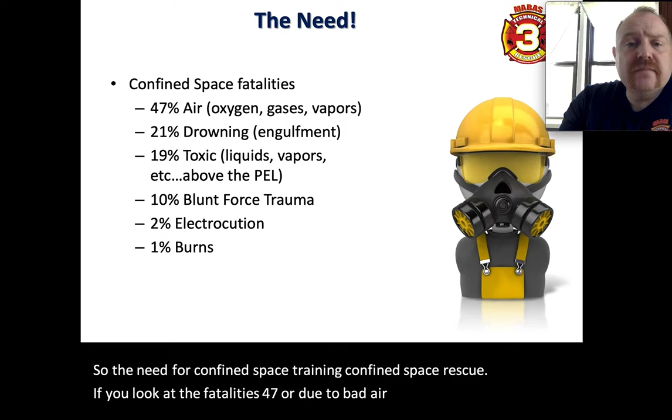All right, so the need for confined space training, confined space rescue. If we look at the fatalities, 47% are due to bad air, meaning lack of oxygen, gases, vapors, etc. Why do you think oxygen is the number one thing that gets us? Well, it's because we can't see it. There's no sign telling me, hey, it's bad, it's going to come get me. I probably can't smell it, I probably can't taste it. So air tends to be the number one thing that gets us.

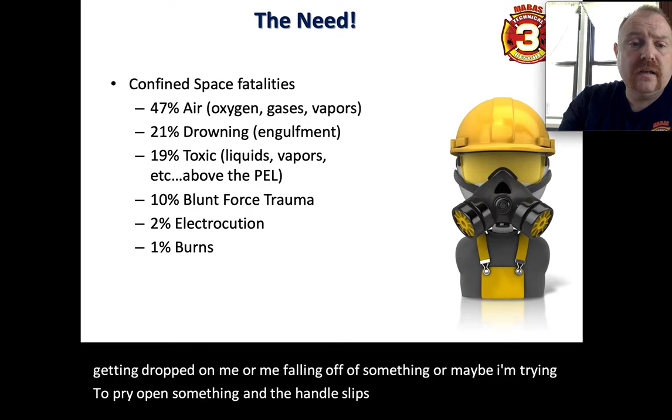All right, second would be drowning, then toxic substances. 10% blunt force trauma, probably something getting dropped on me, or me falling off of something, or maybe I'm trying to pry open something and the handle slips and whacks me in the head. 2% electrocution, and then the last one being burns. None of those are really great ways to go out.

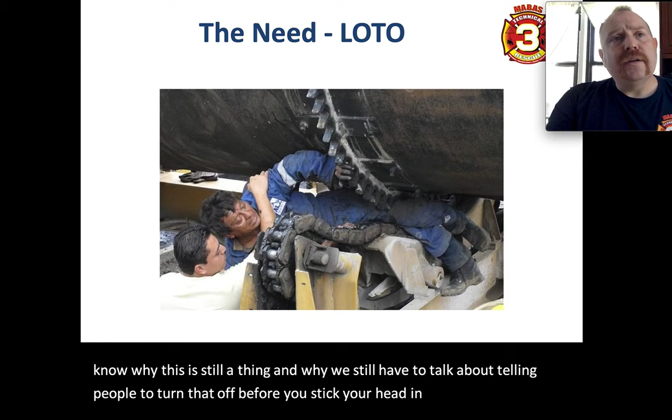Another big issue for us is going to be lockout tagout. I don't know why this is still a thing and why we still have to talk about telling people to turn that off before you stick your head in there, or disconnect the power. But it's still a thing, so lockout tagout is still very much important. I can show you pictures and pictures of people either trapped and dead, or trapped and still alive, kind of like this guy, just all the reasons why lockout tagout is so important.

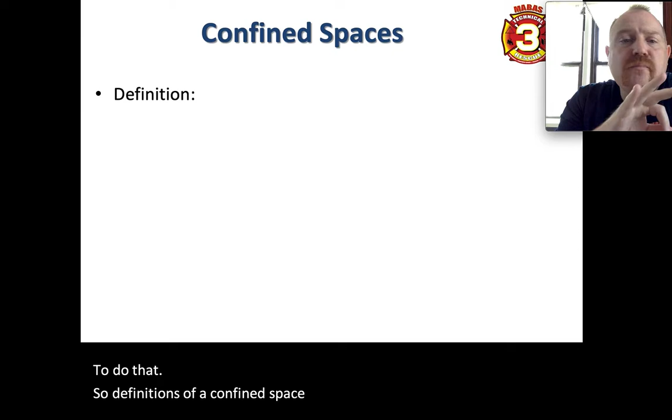So, definitions of a confined space. OSHA has a three-pronged component for their definition of a confined space. First, it has a restricted entry or exit. Restricted doesn't mean one way in and one way out - if that were the case, every bathroom would be a confined space. There's nothing restricted about walking in and out of a door. Now, if I were to board off that door and have to crawl in and crawl out, now it's restricted. OSHA even differentiates between walking down a flight of stairs versus climbing down a ladder. If I have to climb down a ladder to get into a pit, now that's restricted. Walking downstairs is not restricted.

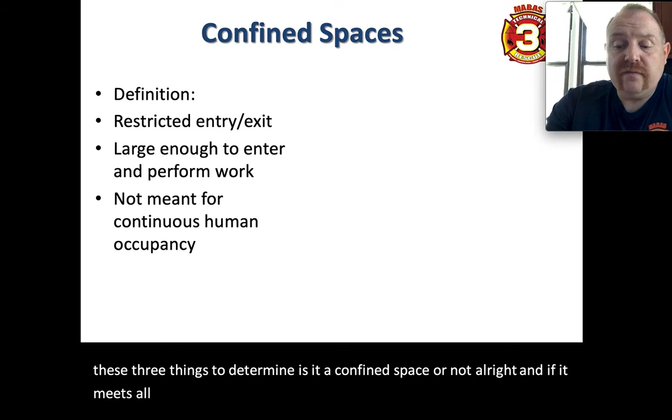The second component is that it has to be big enough for me to get in and actually do something. So a mailbox, for example, can't be a confined space because it's not big enough for me to get in and do something. The last one is that it's not meant for continuous human occupancy. So if I'm looking at confined spaces in my town, in my fire district, I'm using these three things to determine if it's a confined space or not. If it meets all three, then yeah, it would be a confined space as defined by OSHA, by ANSI, by NFPA.

Now we have to determine, is it permit required or not? In order for it to be permit required, it has to meet all three of those definitions plus any one of these four. Number one, it meets the definition and it has a bad atmosphere or has the potential to have a bad atmosphere.

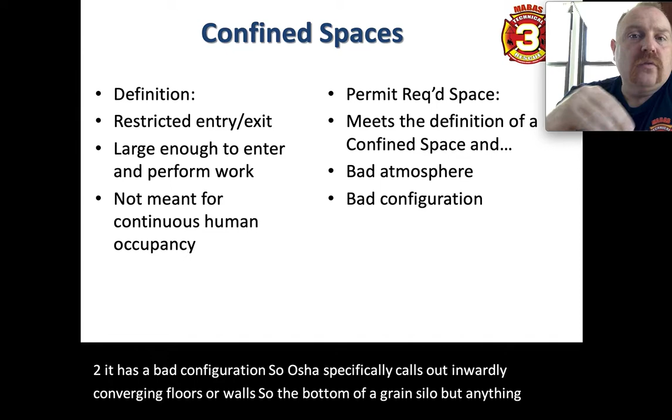Number two, it has a bad configuration. OSHA specifically calls out inwardly converging floors or walls, like the bottom of a grain silo, but anything that could get me caught or stuck would make it permit required. There's an engulfment hazard of some type, so that could be liquid or sludge, grain or soil, anything like that. And the fourth one, OSHA really likes their catch-alls. They like to have a catch-all in place: any other known hazard.

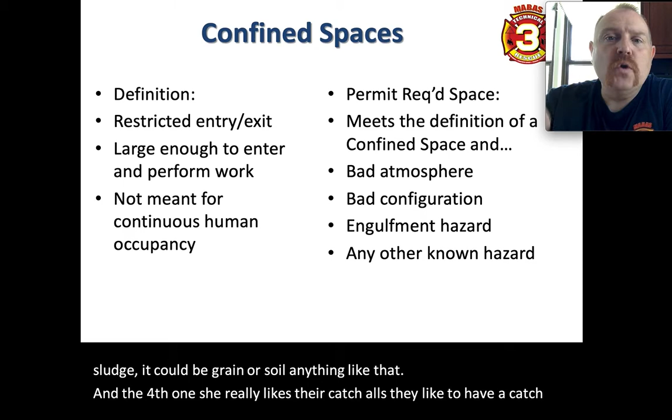So I'm armed now with these three components of the definition of a confined space. If it meets that, then I need to determine does it require a permit or not, and all it has to do is meet any one of those four.

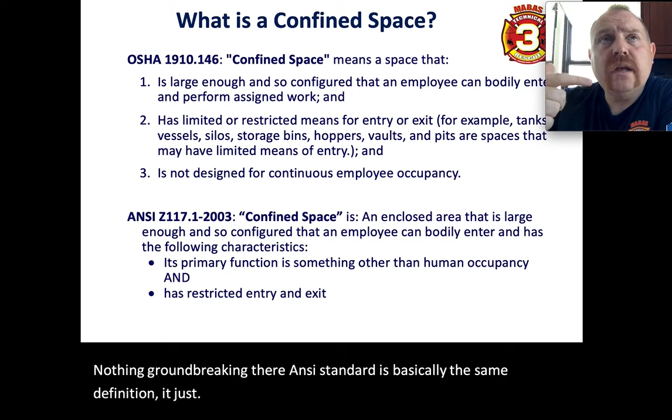Some municipalities, some jurisdictions in North America, add in a component for it to be a permit required space: if medical attention or emergency response is delayed due to the space.

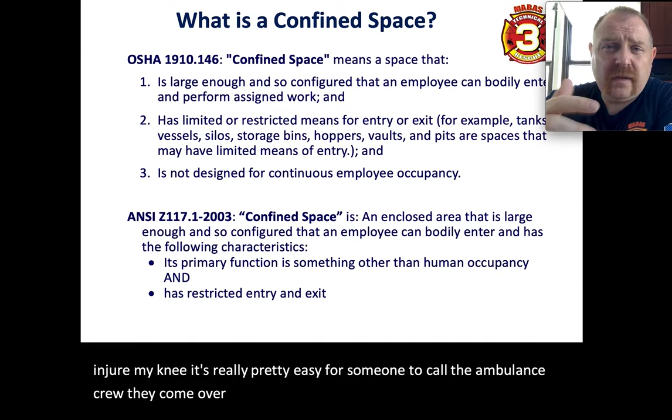So think about a space. If I'm at home or at the firehouse and I twist and injure my knee, it's pretty easy for someone to call the ambulance crew. They come over, put me onto the cot, back of the rig, off I go to the hospital. That same injury inside of a sewer, and I can't climb myself out of there, makes it a big deal. Now all of a sudden it's become a confined space rescue when really I just need help, but because the space has turned that into a greater hazard for me.

So other legislation or rules we might need to follow: OSHA 1926 talks about fall protection, making sure that I don't fall into the space versus falling off of something. Gravity doesn't care if I'm falling into it or off of it, so we need to make sure our attendants are tied off, and people working on or near the hole are tied off.

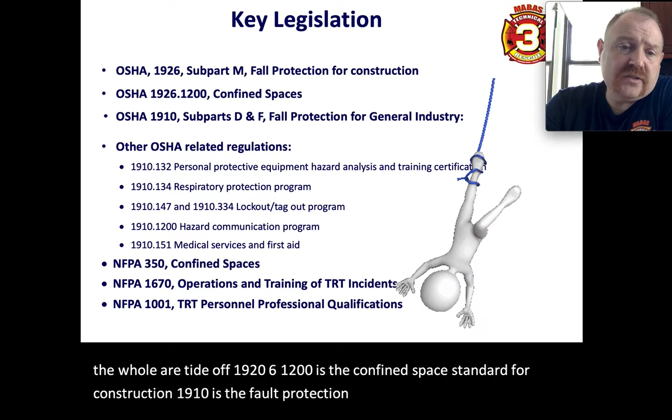1926-1200 is the confined space standard for construction. 1910 is the fall protection standard for general industry. Other ones we have to worry about: respiratory programs, lockout/tagout, hazard communication. If we look at NFPA 350, it talks about confined spaces.

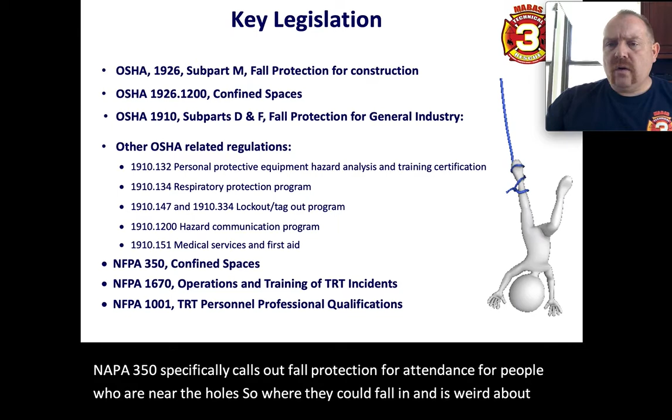NFPA 350 specifically calls out fall protection for attendants, for people who are near the holes where they could fall in. And it's weird about holes - you have a 3x3 hole that's a 20-foot deep hole, and nobody really thinks much of it. I go and put you 20 feet in the air near an unprotected edge with no guardrail or anything, and you act a little bit differently, you kind of edge up to it. But for some reason, when it's a hatch or a hole, we kind of ignore that problem.

1670 is operations and training of TRT incidents, and then NFPA 1001 covers TRT personnel professional qualifications.

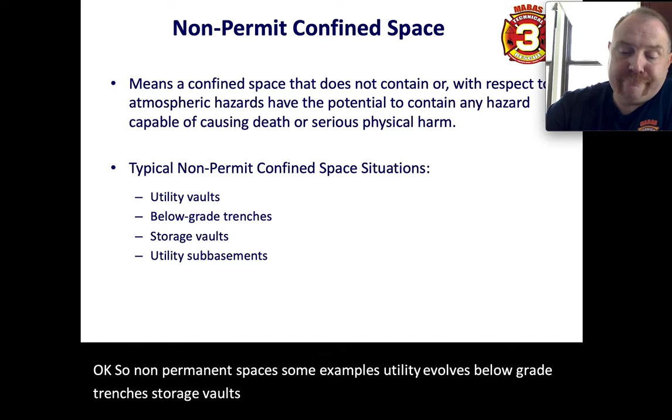Okay, so non-permit spaces, some examples: utility vaults, below-grade trenches, storage vaults, utility sub-basements. We see these all over the place. Some examples of permit-required spaces: chemical storage tanks, storage pits, boilers, underground tunnels, etc.

All of these contractors that we see going into confined spaces, or companies in your towns, they should have a written confined space management program. Any employee who works there should have the ability to go over and say, 'Hey, can I see the confined space program?' Open it up and be able to read what the rules are, what the policies are, what the SOPs are, etc. Likewise, those are our SOPs, that's our program, so we have the same thing.

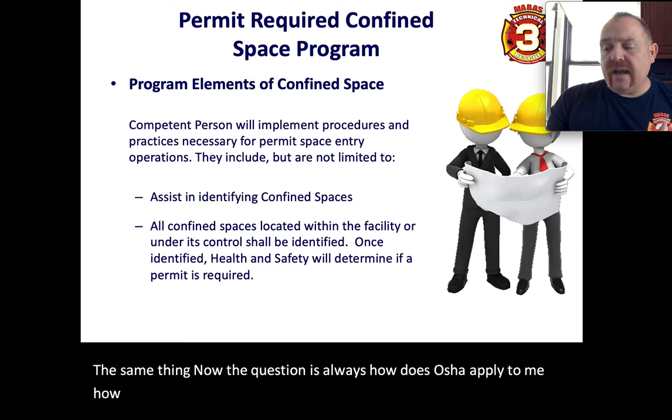Now the question is always, how does OSHA apply to me, how does OSHA apply to the fire department? Well, if you think about it, we're at work. When we train, we're at work, it's not part of an emergency response scenario. So for us to solely say, 'Hey, NFPA is the one I have to follow' - I'm at work, we fall under OSHA. Now in Illinois, because we're municipalities, IDOL is who enforces it, but they're just enforcing what OSHA says.

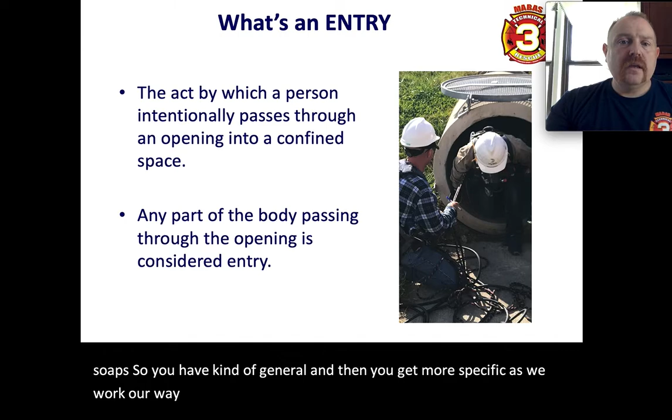So kind of the next level down from that is our SOPs. So you have kind of general, and then you get more specific as we work our way down. All right, so what is the definition of entry? Well, most of us, if we remember anything from confined space class, know that it's the breaking of the plane into the space with any part of my body. So the question is, am I allowed to break the plane into a confined space?

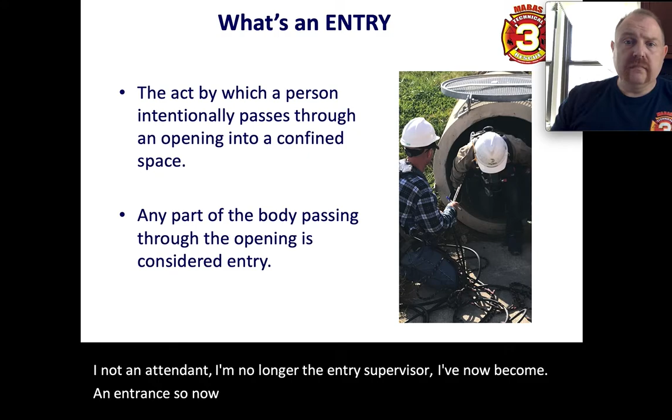The answer is yes, I absolutely can. But what am I now? I'm not an attendant, I'm no longer the entry supervisor. I've now become an entrant. So now on my permit, I need to be documented as such. There's nothing that says I can't make entry, but if I'm going to make entry, even by putting my hand in there, I have to be documented as an entrant. Just check and make sure I'm giving you guys all the info you need for your note sheet. So some potential hazards: engulfment, oxygen deficiency, oxygen enrichment, flammable gases, vapors, toxic substances,

IDLH atmospheres, and then physical hazards, slips, trips, and falls. I hit my head on something. It's full of snakes or scorpions or spiders or something like that.

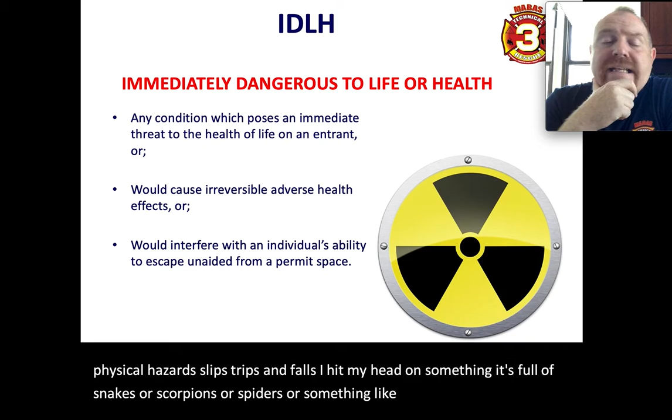This term IDLH, we see this, we talk about it, meaning immediately dangerous to life or health. This doesn't mean that I touch it and I die. It's not like some of the facilities and institutions we've gone to take classes, where it's 'oh, you touched that, you're dead.' It doesn't always mean that. It could mean that I die later—later today, tomorrow.

So think about that idea of IDLH. We're going to treat a space as being an IDLH hazard until proven otherwise. So when we're assessing the space, just don't assume that it's okay. I realize the ducklings are all right, but how much oxygen does a duckling use versus how much do you use? So assume that it's an IDLH atmosphere until proven otherwise.

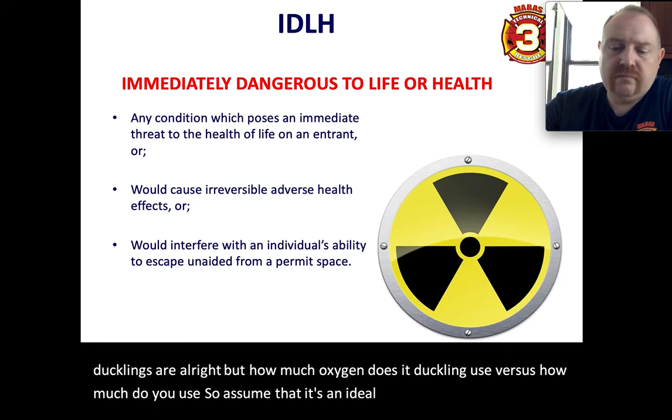Some of the hazards we might run into: explosions, fumes, machinery. When I see that picture, I think about the confined space incident they had out in Algonquin, at the Raging Buffalo snowboard park, where the guy got caught in one of the vaults underneath the magic carpet. He got his arm stuck in it, and they needed mechanics to actually help take it apart.

Then you have entrapment hazards, noise. Noise isn't one that you think about readily, but it's really going to hamper our communications and the way we think, and how we're able to work in there. None of us want to be walking around at 50 with $6,000 hearing aids on our ears.

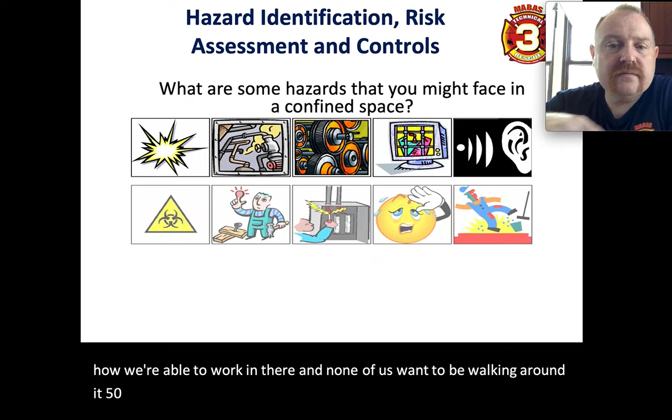Biologic hazards, standard work hazards, electricity, heat—it's one that we don't think of as much. You have young guys who might have gone out and tied one on the night before and come in dehydrated. You have older guys getting outworked by younger guys, so we drank too much coffee trying to keep up with them. So if heat is an issue, make sure we're rotating guys a lot faster and a lot earlier.

Also, it might be that you're one of the younger team members getting outworked by an old guy, so you're trying to keep going. Make sure we stay hydrated and rotate people out more often. Last one on there, slips, trips, and falls, and then the bottom one, weather stuff. Those first two, sometimes that's not stuff we can control.

If I'm in a storm sewer, it's really kind of impossible for me to fully lock out and tag out that storm sewer. Out in California, they actually have diverting valves that they can use to divert the water a different direction, so they can pull it off. But with us, we can't do that. So make sure we're paying attention to what the weather's doing. Drowning or engulfment hazards, radioactive stuff, and then sludge, cave-ins, etc. Watch this video and see if you can tell me what you think about it.

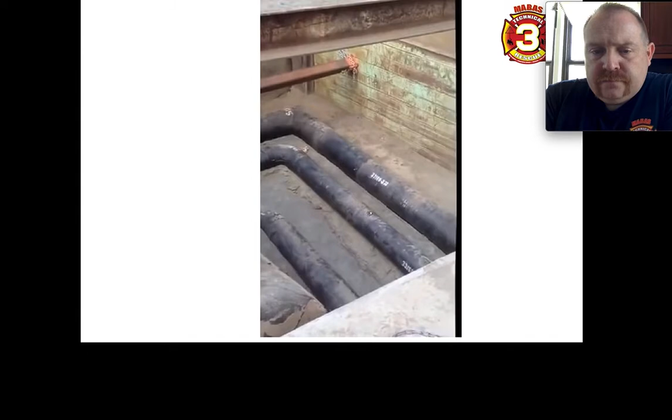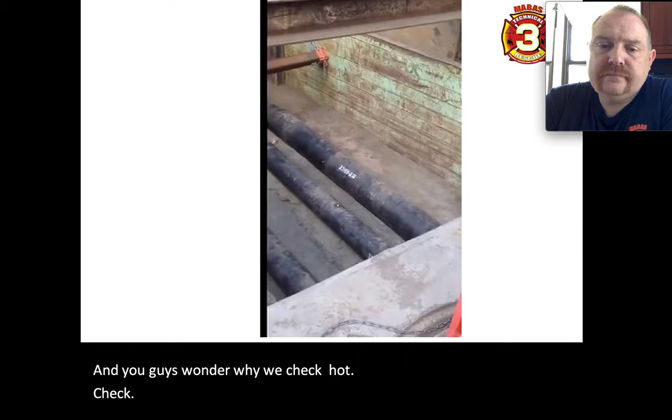I wouldn't want to be in that vault right now. You kidding me? Couldn't pay me enough to do that, Joel. And you guys wonder why we checked the fucking torque. That didn't sound good. That's why we check torque on bolts, guys. Jesus. Yeah, Joel, maybe you should step out for a minute, until that thing settles in. Yeah, get out.

All right guys, sorry that the video was clipping so bad. I think it's the recording for this video, plus the Mac is six years old, so it might be having a hard time. So if you watch this video, there's a lot of stuff going on here that shows it's in bad shape.

First of all, you can hear them talking about it, saying 'oh, you couldn't pay me enough to be in there.' There's one part where the camera pans up to an attendant standing there, and he looks right at the camera—he knows something's wrong, but they all know, and they're not going to say anything. They're not going to stop it for some crazy reason, because nobody wants to be that guy. They don't want to be the one who says 'hey, this isn't safe, let's not do this.' They'd be the nervous Nelly.

So they just let it keep going, and then what ends up happening is that guy kind of gets blown out of that hole. At the very end of the video, you actually see the attendant or the entrant kind of walking away, but it looks really, really bad.

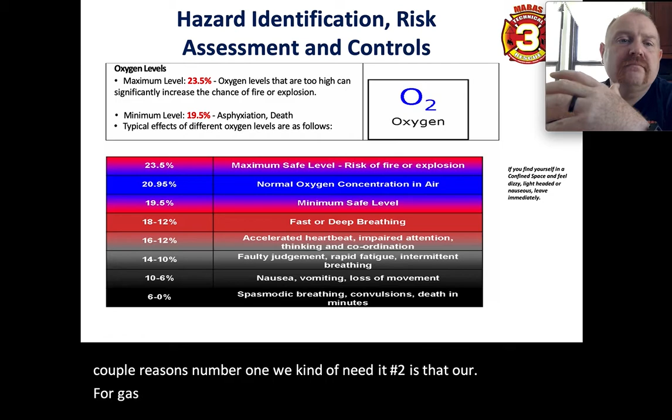All right. So hazard assessment. The first thing that we're always going to check for when we look at the atmosphere is going to be oxygen, for a couple reasons. Number one, we kind of need it. Number two is that our gas meters need a certain amount of oxygen in the air for the reading to be accurate. So we kind of want to know what that number is.

So years ago when we had 4 or 5 individual meters, and this one checks oxygen, we would just check that one first. Well, now with the technology we have, the 4-gas meter just checks it simultaneously. So if I look for appropriate values in the air, 20.8 or 20.9 is what we breathe normally. We are designed to breathe dirty air.

78% of what we breathe is nitrogen. So we breathe it in, we breathe it right back out. And then there's like another percent of a bunch of other stuff that we just kind of breathe in and breathe out. So the good range is 19.5 to 23.5. If it's 19.4 or less, it's considered oxygen deficient.

Now, at 19.4, I don't fall over dead. It means I'm going to start breathing a little bit harder. As it starts dropping, I have an impaired attention span, which I already have. I'm not making good decisions. Some of us are making bad decisions anyhow, so I don't know how you tell the difference. But then as it goes lower and lower, finally, I would go unconscious. But there would be other symptoms first.

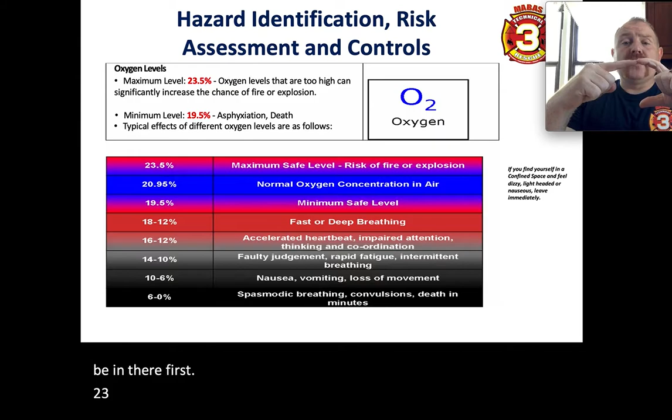23.5 is the upper limit. So anything 23.6 and above would be considered oxygen enriched. Obviously, the reason why that would be bad for us is that fire really, really likes oxygen. So what we're looking for is oxygen that's 20.9. If it's not 20.9, my question is, why isn't it? What else is in there that could be causing me a problem? 1% of change could mean 10,000 parts per million of some other gas. So let's fix it, ventilate it, and move on.

So the second thing we look at is going to be the LEL, or the flammability. So we look at our LEL and the UEL. The LEL, the lower explosive limit, or the LFL, the lower flammable limit. And our 4-gas meters are going to start to alarm at 10% of the LEL. So right here is where our meter is going to start to alarm. Now, if your meters are set to alarm at 5 and 10, it'll start at 5% of the LEL.

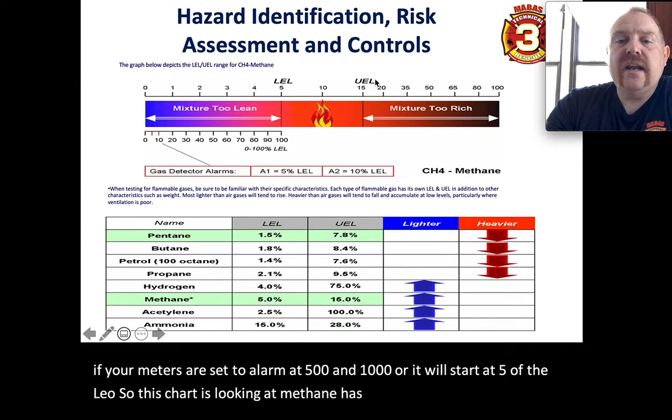So this chart is looking at methane. It has an LEL of 5% and a UEL of 15%. Here it's too rich, here it's too lean. Our meter is going to alarm down here. Now, that's because my meter has been calibrated to methane.

Well, if the gas that's in the space is different or has a different LEL or different flammable range, it's not going to be 100% accurate. So if we're looking at, say, propane, propane has an LEL of 2.1. So we're going to say right here is where we're at the LEL for propane. Well, now I don't have 90% more to go. I'm almost a third of the way there already.

So if it's alarming, if it's showing us that there's an LEL in there, we're going to ventilate it and get rid of it and hopefully find the cause of it or the source, because we're all flammable. Okay.

So some definitions that we need to understand. Percentage. If we're talking about percent, you have to know the total amount in order to use the term percentage. All right. If there's 5 of us in the room and I say 20% of us have red hair, well, that means 1 out of 5 has red hair. I have to know the total amount.

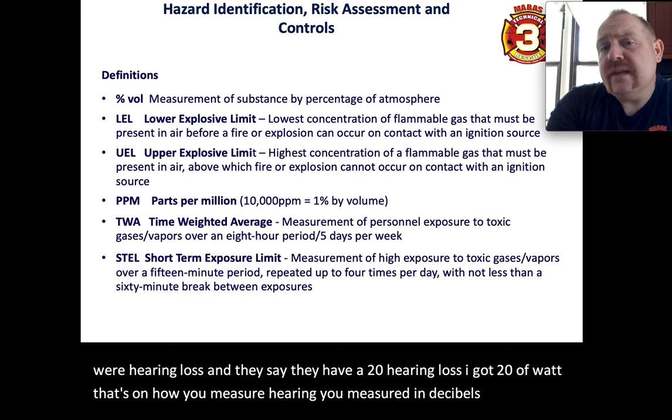It's like when people say they have a 20% hearing loss. Like, 20% of what? That's not how you measure hearing. You measure it in decibels. So we tend to use percentages because we understand them, we think. So make sure that if it's measured in percentage, that's what we're using. The LEL and the UEL, we talked about just a minute ago.

Parts per million. The easiest way to explain parts per million is if I were to take this room and fill it up with 1,000,000 white ping pong balls. I take one and I paint it red. Now I have 1 part per million. 1% of 1,000,000 is 10,000 parts. So think about that for a second.

If I've got a change on my 4-gas meter of 1% of oxygen, so there's some other gas that's displacing the oxygen, pushing it out of the way, there could be 10,000 parts per million of ethyl, methyl, bad stuff number 2 that may not affect me right now, but gives me cancer 10 years down the road.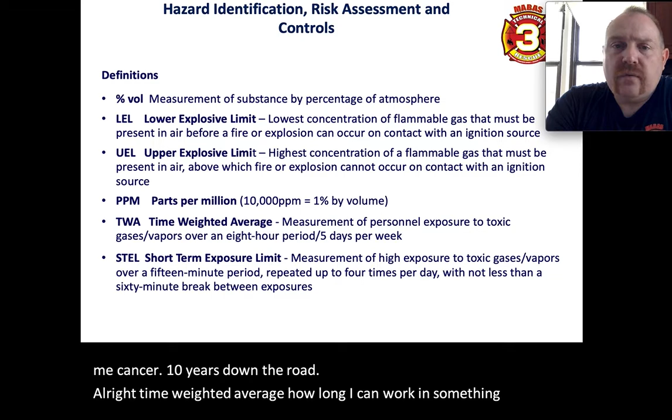All right. Time weighted average: how long I can work in something, 8 hours a day, 40 hours a week. And then your short-term exposure limit: how long I can work in an environment for 15 minutes, 4 times a day with a 1-hour break in between. So 15 minutes, 1-hour break. 15 minutes, 1-hour break.

All right. Where we're going to get this information, to know what our time-weighted average is, what the STEL is, what my ceilings are, where it's IDLH, where the flammable limits are, etc., is going to be in the SDS of the chemical. The companies in your district should be using the GHS system, the Globally Harmonized System. Any country that's part of the UN has adopted this, so SDS, or safety data sheets, are now standardized. So it should look the same.

What used to happen is it was dependent upon manufacturer to manufacturer, what was on there, how it was organized, etc. So now they've given a better organization to the SDS. All right. This is going to be our roadmap. This is going to be how we're going to know what the hazards are.

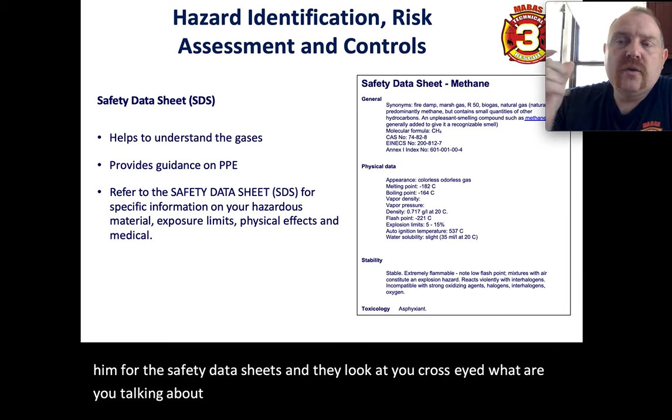If you show up and you ask them for the safety data sheets and they look at you cross-eyed, like, what are you talking about? That should raise your antenna and tell you, all right, this is going to be a bigger deal because they don't even know what an SDS is.

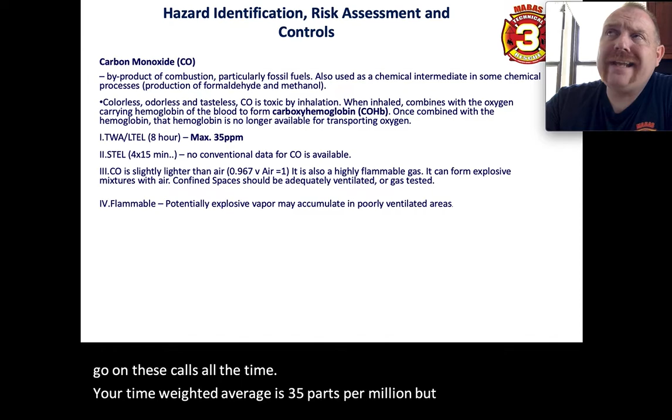All right. So the next chemical we want to look at is carbon monoxide. We go on these calls all the time. Your time-weighted average is 35 parts per million. But if you look at somebody else, like I think NIOSH is 25 parts per million. So depending on where you're working, OSHA's 50 parts per million. Again, if it's there, we're going to ventilate it. We don't want to breathe it. It's bad. It'll give us a headache and eventually make us nauseated.

The weight of carbon monoxide is 0.967. So remember, when we look at vapor density, we're looking at the weight of the gas. So we take air and we give it a value of 1. So like helium is 0.5. It's much lighter than air, so it's up there. Carbon monoxide is 0.96, so it's slightly lighter than air, so we're going to expect it to be up a little bit, but it pretty much could be just about anywhere.

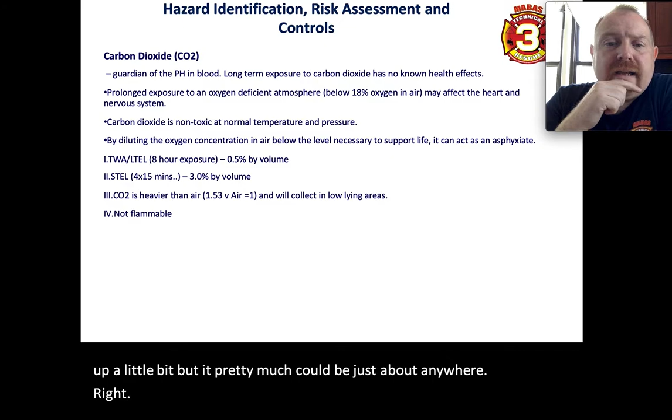All right. Carbon dioxide comes from us. That's what we breathe out. So we go on CO calls. We do not go on CO2 calls, at least not typically. We don't use a CO extinguisher. We have a CO2 extinguisher. This comes from us, and on the good-bad scale, it's bad. So the space that we're in, we could be poisoning ourselves just by being in there.

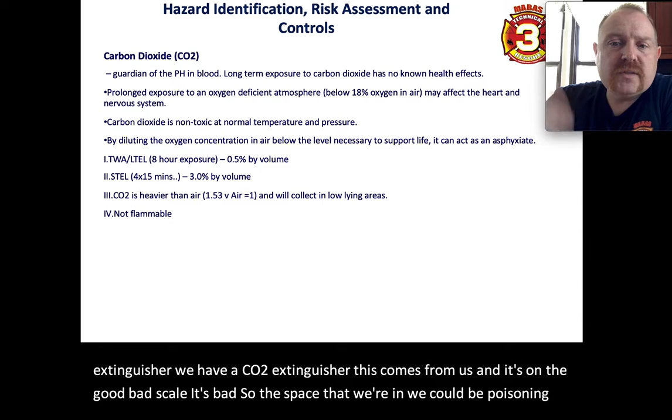There's a video from a long time ago of a train derailment, and you see a boss. You can tell he's a boss because he's wearing a white shirt, and there's product offloading of this tanker car, and he like sticks his hand in there and tastes it. I know we all watched Miami Vice as kids, and Sonny Crockett always tastes the cocaine. So yeah, don't trust our 5 senses. Make sure we're using some kind of a meter or something.

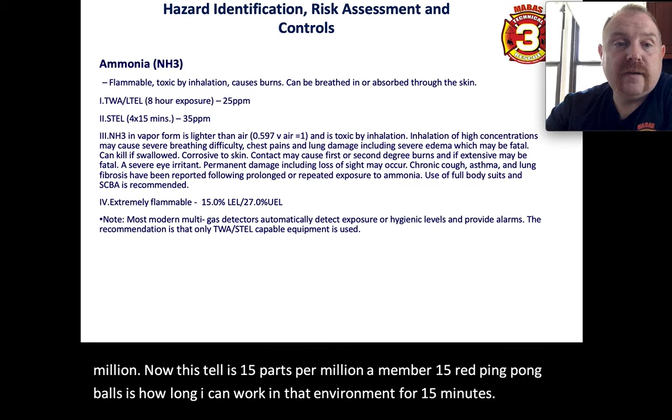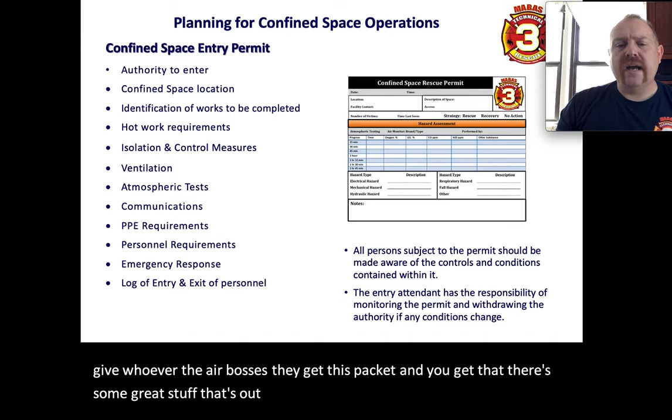All right. So your permits. We developed this permit last year. We wanted something that was kind of quick and easy and kind of dirty, that a squad boss at a space could fill out while companies are working. There are some great resources out there, where it's 20, 30 pages, confined space permits with different sections. You give whoever the air boss is this packet, and you get that packet. There's some great stuff out there. We just wanted something easy and quick and dirty that would help us meet OSHA standards, OSHA requirements, and yet allow us to get some work done.

On the left-hand side is information that has to be there. OSHA lists out what you've got to have on your permit. So date, location, description of the space, how many victims, the last time they were seen, what strategy are we in, rescue, recovery, or are we not doing anything at all? What your atmospheric testing says, the air monitor brand and type of monitor, and then signing off saying, I'm the one who did it. We need to be documenting our results every 15 minutes. That doesn't mean we only check it every 15 minutes. It just means we're going to actually document it every 15 minutes.

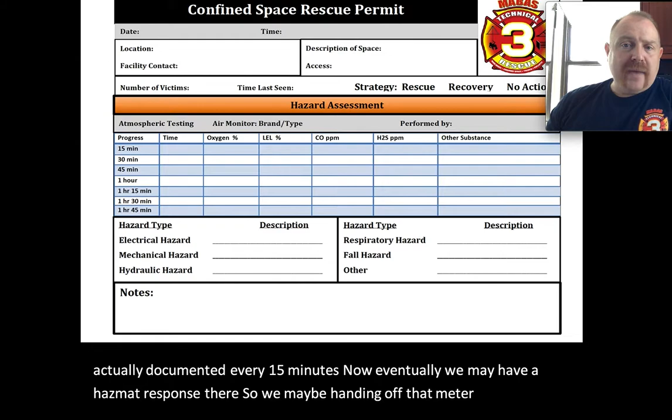Now, eventually, we may have a hazmat response there, so we may be handing off that meter to a hazmat team member. I would much rather have a hazmat team member who is really in tune with what this thing can and can't do. I'd rather have that information come to me versus one of us who, when things start flashing, starts hitting buttons and messing it up sometimes. So eventually we might be handing this off to somebody else.

The other thing is that I really like working on a 2 meter system, one up top with a pump with a hose, or one outside the space with the hose maybe attached to like a broom handle that we can stick in there and monitor, and then a second meter on the entry teams. If both meters are saying the same thing, we can be pretty confident in their results. If they're way off, there might be a problem with one of them, or it could simply be that the entry team is working in an area that the meter up top can't sample. So, marking that information down so that we're keeping track as we go through.

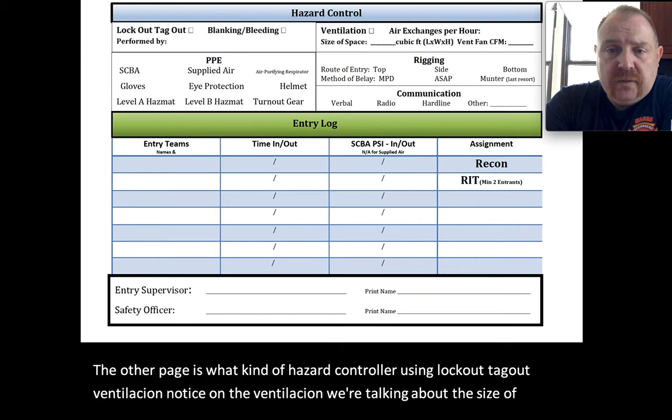You also have other hazard types: electrical, mechanical, hydraulic, and any other respiratory, fall hazards, anything else, spiders, snakes, whatever. The other page is what kind of hazard control we're using. Lockout, tagout, ventilation. Notice on the ventilation, we're talking about the size of the space. So we're going to ask you to do a little bit of math. Length times width times height. That'll give you the cubic feet. And then what the CFM of the fan is. We'll talk about that in a little bit. And then actually doing the math to figure out the total air exchanges per hour. All right.

Down on the entry log, who's going in, what time did they go in, if they're on SCBA, what's your pressure in, pressure out. We need to make sure that we have names. I would also probably, underneath the entry team, have their unit number. Squad 1, squad 2, we call them recon, etc.

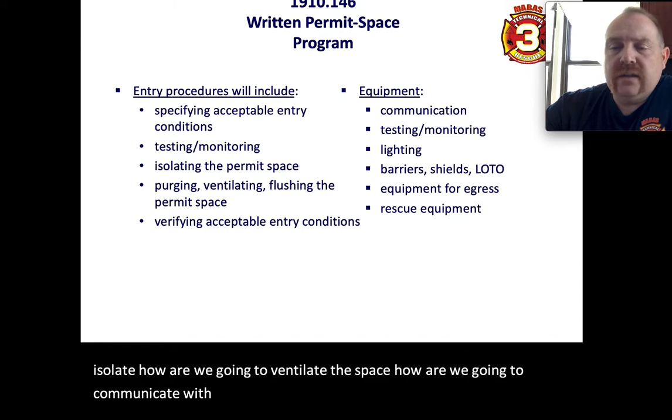So your written permit, permitted space program, what are our entry conditions going to be? How are we going to test? How are we going to isolate? How are we going to ventilate the space? How are we going to communicate with one another? Lighting, barriers, lockout, tagout. All of these things are included in a standard confined space entry program.

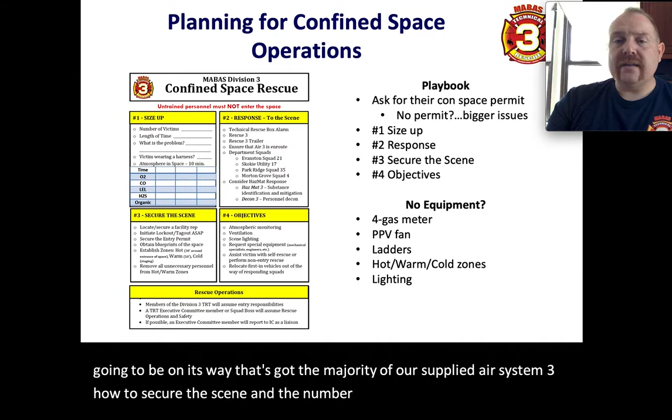Number 1 is size up. Number 2 is what's the response, so ensuring that we actually ask for a box alarm for the team to show up. Making sure that, especially for confined space, Air 3 is moving from NIPSTA if it's a weekend or after hours, ensuring that it's on its way. That's got the majority of our supplied air system. Number 3, how to secure the scene. And then number 4, what are your objectives? What are we asking you to get done before the team arrives?

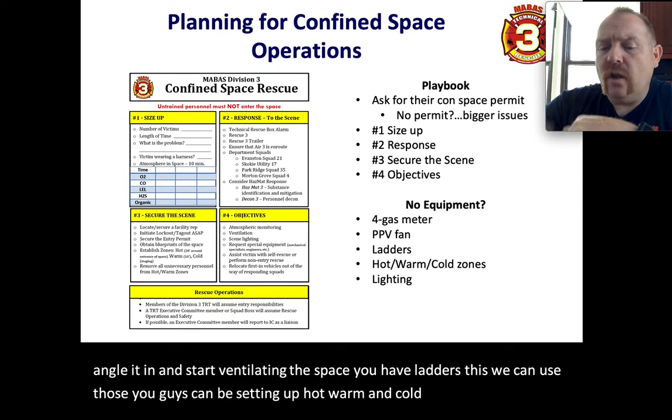Now, some places will say, hey Dave, we don't have any confined space equipment. But my guess is that you have a 4-gas meter, you have a PPV. So if ventilation is an issue, especially the new battery-powered blowhard fans, we can angle it down and start ventilating, or angle it in and start ventilating the space. You have ladders, so we can use those. You guys can be setting up hot, warm, and cold zones, and then lighting. You've got all those things that really make it a lot easier.

This is the kind of conversations you ought to be having with your first-in companies, so they feel comfortable with it, and that they're okay with asking for the team to come in. You'll notice the bottom of that form explains that we're coming in to help you, and that we'll give the incident commander somebody to kind of help them through as the incident progresses.

So your equipment. We mentioned the 4-gas meters. On Rescue 3, we have Draeger 4-gas meters, and then we have an MSA Altair. Those are the ones that we've been issued. We bought the Altair a few years ago. There's two forms of maintenance that needs to be done to the 4-gas meters.

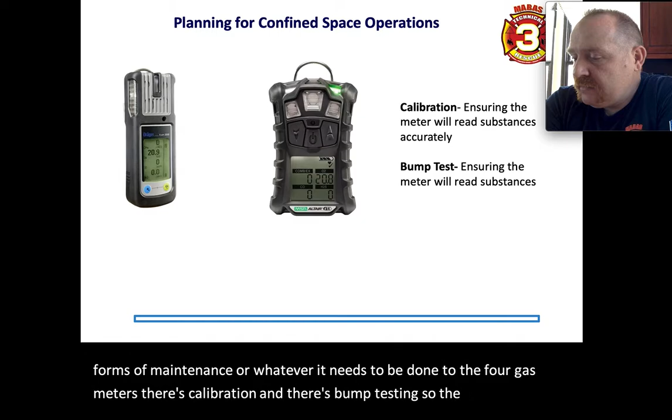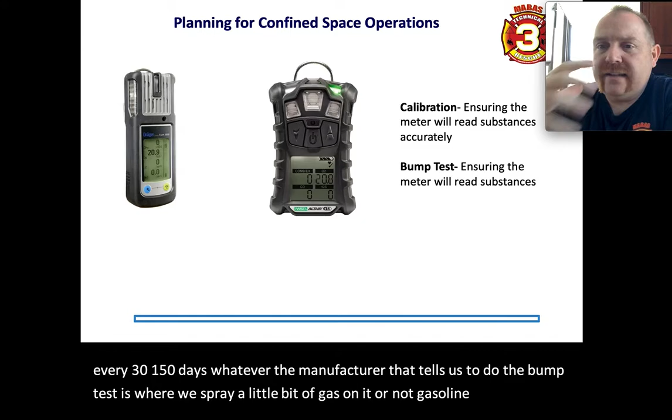There's calibration and then there's bump testing. I just realized I missed one of my questions for you guys, I'll talk about it in a minute. Calibration is making sure that it will read it accurately, so typically that calibration gets done either every 30, 60, 90 days, whatever the manufacturer tells us to do. The bump test is where we spray a little bit of cal gas on it, or blow on it, or inject into it, and it'll start to alarm and show us that it can read gas.

OSHA wants us to do that bump test before any entry. The problem is that for us in a rescue scenario, we don't have that ability to go, hold on, Bob, we got to do this thing with the meter before we can get in there. If they already have meters that are working, we can ask them, have they been calibrated? Have they been bump tested? And if yes, it's on our permit, we're good, we can trust their meters. I would want to back it up, trust but verify. But we can be using our meters to put them to work also.

When the hazmat team arrives, or one of our team members who's also dual trained in hazmat—Kevin Maslin, Doug Lindstrom, Mikey Isom, I'm sure I'm missing others—they show up and we can say, hey, can we get the other meters? Can we switch them out after they've been bump tested? Then we can keep the operation going. We're not going to stop and do nothing while we're waiting for a bump test. That's just not feasible.

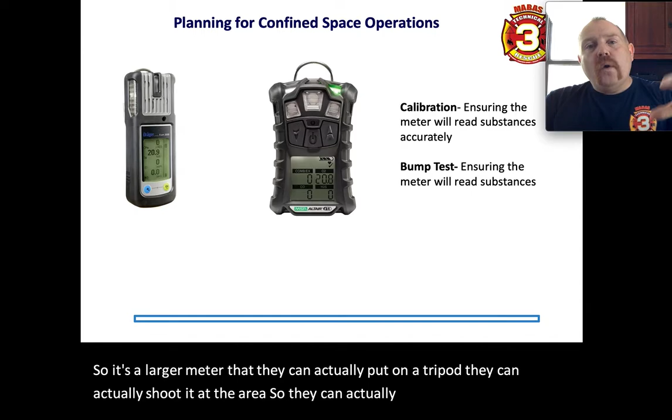The hazmat team has more meters, and they also have what's called an AreaRAE. It's a larger meter that they can put on a tripod and actually shoot at the area, so they can measure what kind of air and particles are coming out of that space. So we're testing in the space.

You think about an incident—where does everyone want to be? Well, they're going to go right to the hole, and everybody's got to go look over and go, oh look, it's a sewer. It's what everybody does naturally. Well, we don't know what's coming out of that space. So if we have the hazmat team there, we get that opportunity. We can actually measure and see what's coming back out of there. Is it hazardous to us? Do our attendants need to be in some type of PPE?

All right, the last thing for meters: make sure we know we're using the meter the way it's designed to be used. So both of those meters on the screen, neither one has a pump on it.

So if I'm trying to test the space, what you'll see people do sometimes is take a rope, attach it to the meter, and go dropping the meter into the space. A couple problems with it: if it starts to alarm, you pull it back up to see what it said. By the time you pull it back up, it's not going to say that number anymore. So you don't know how or why it alarmed. Maybe you're savvy enough to check the peaks, but my question is, did you clear the peaks before you put it in, or are you just hoping that's what it's related to? We don't really know.

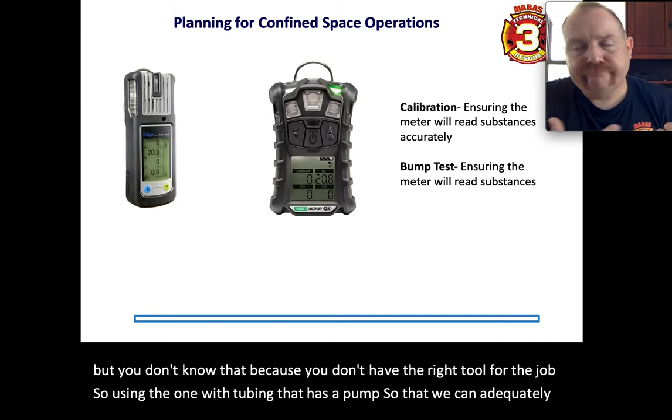Likewise, you could lower it in, and remember there are set limits where it'll start to alarm. If it's at 9% of the LEL, it's not going to alarm. So you're at 9, but you don't know that because you don't have the right tool for the job. Using the one with tubing that has a pump so we can adequately measure the space—that's the way to go. Only other thing with that tubing: you have to wait for the pump to draw the air up into the meter and give it a second to think about it before you move on or take that reading.

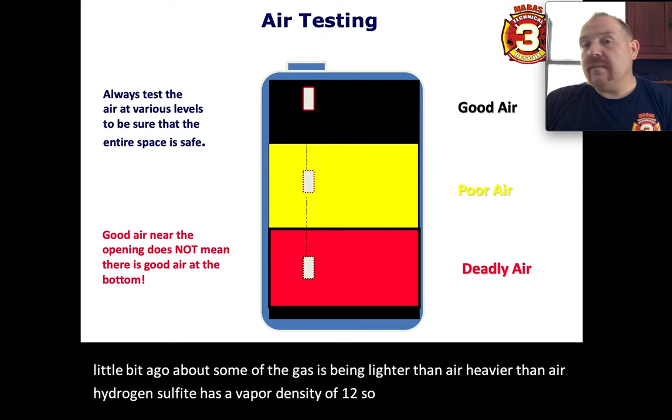When we go to do that testing, we're going to test top, middle, bottom of the space. We just talked a bit ago about some gases being lighter than air, heavier than air. Hydrogen sulfide has a vapor density of 1.2, so it's heavier than air and will be at the bottom, versus ammonia, which is like 0.5, so it's going to be up high.

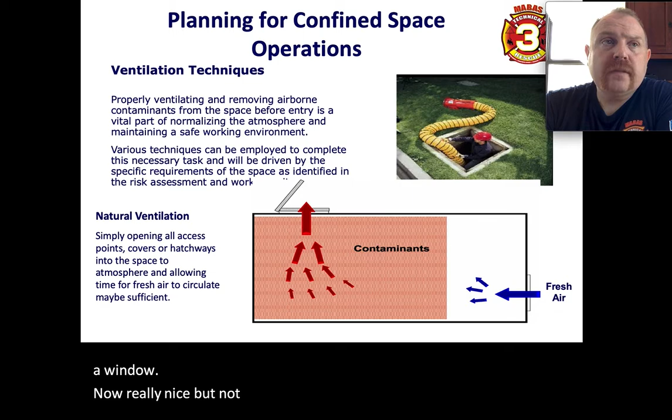With these issues, ventilation is going to be one of the best things we can do. Two types of ventilation are out there: natural ventilation and forced air ventilation. Natural ventilation is opening up a window—really nice, but not always reliable. So most of the time we're going to go to a forced air ventilation system.

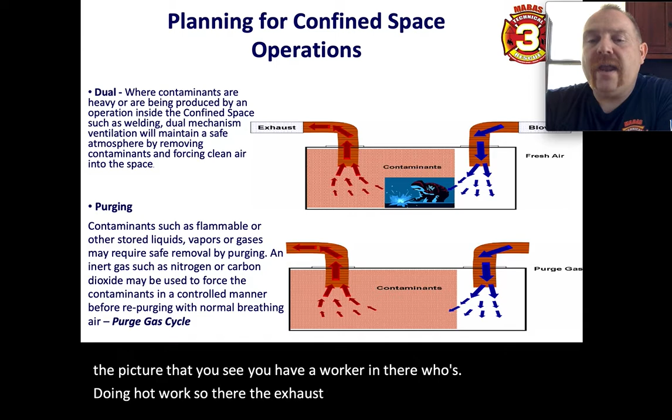That top picture—we're blowing fresh air in, we blow the bad stuff out, we're good. Another type of system might be an exhaust system, not as popular or widely used, but it could work, where we're drawing the bad air out and drawing fresh air in. The Cadillac of systems is really a push-pull: you're pushing fresh air in, drawing bad air out. The picture shows a worker doing hot work, so the exhaust isn't just drawing out random air—it might even be a local exhaust, sitting right next to where he or she is working, pulling the bad stuff out of the space.

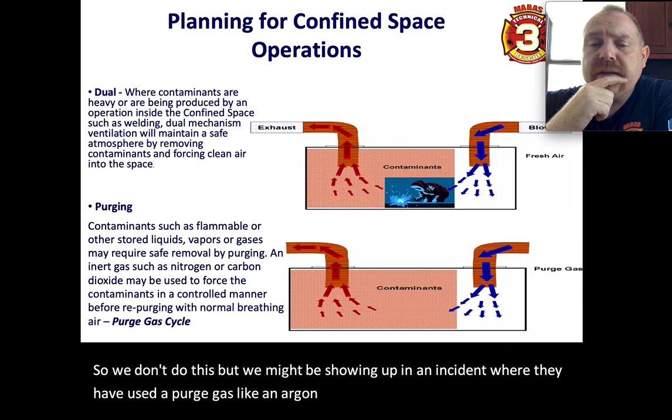They also might use a purge gas. We don't do this, but we might show up to an incident where they've used a purge gas, like argon or nitrogen, to push all the air out so the environment is less flammable. That worker who's in there welding would be on a supplied air system or on an SCBA.

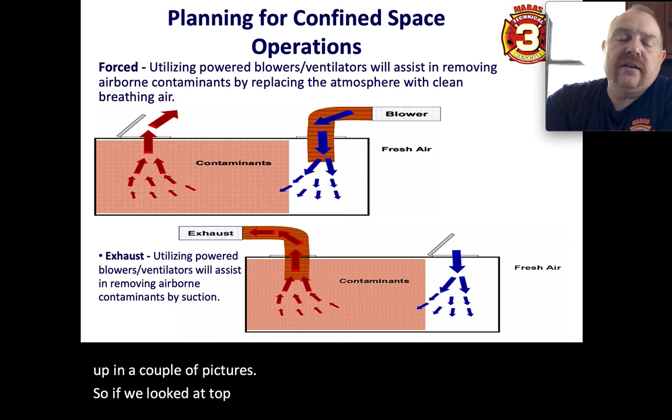When they're done, they would repurge it with fresh air and close it out. Now there are some problems with ventilation, and sometimes it's just because we tend to screw it up. Back up a couple pictures. If you look at that top picture, you have the blower fan going in, and the hose only goes in a little bit. So what ends up happening is we circulate the air up here, but we don't really circulate the air down here. We want that hose sitting a foot or two off the floor or off a wall. That gives a spot for that air to push and push everything up and out.

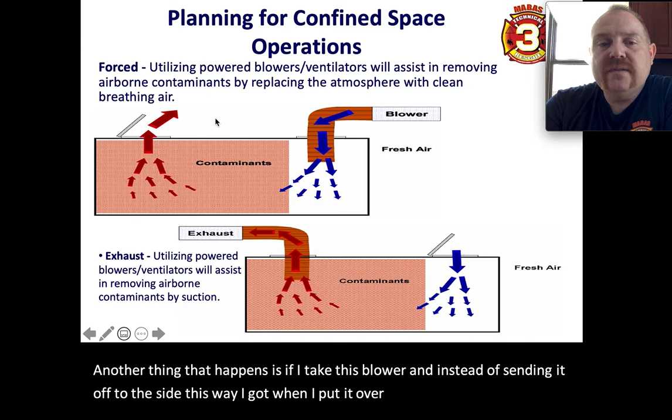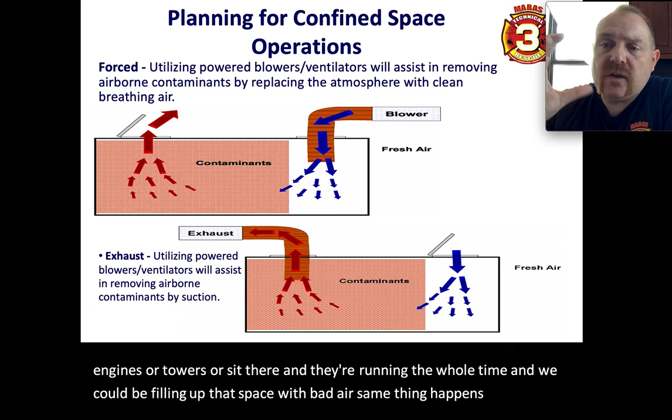Another thing that happens is if I take this blower and instead of setting it off to the side this way, I put it over here. Now what happens is I push fresh air in, fresh air pushes the bad stuff out, the bad stuff comes out, gets sucked up by the fan, and gets pushed right back in. Same thing happens with squads or engines or towers sitting there running the whole time, and we could be filling up that space with bad air. Same thing happens with the duct work and the kinks that happen. We've got to be diligent about keeping everything nice and smooth.

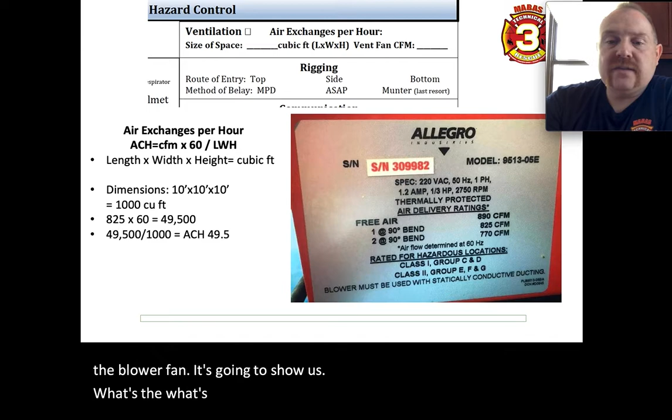So when we look at ventilation, we are ventilating the space, and I've asked you to figure out the size of the space. Length times width times height gets you the cubic feet. Then we want the CFM of the fan. On the side of the blower fan, it shows the capability of that fan. You'll see free air, meaning it's just pushing straight through with no bends, no tubing — we're at 890 CFM. If I put the tubing on with one bend, it drops me down to 825. You can see it drops off significantly after that.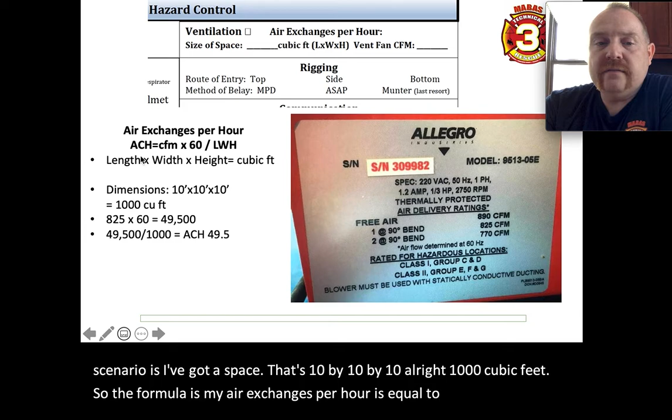So our scenario is I've got a space that's 10 by 10 by 10 — 1,000 cubic feet. The formula is: air exchanges per hour equals the CFM of the fan times 60, because we're talking per hour, divided by length times width times height. So 825 times 60 is 49,500. 49,500 divided by 1,000 gives me 49 and a half air exchanges per hour.

So how long would it take for this space, with this fan, to complete one revolution of air? Realistically, it should be done in a little bit over a minute. But if you've ever taken a space and filled it with theatrical smoke, like we did last summer in Park Ridge, where we completely charged the space with theater smoke and then tried to ventilate it — based on the capacity of the fan and the space, it should have cleared out in about a minute and a half, but it took closer to 4 or 5 minutes, just because you have all the little holes and corners where the bad air can hang out. So we're trying to get as many air exchanges as possible.

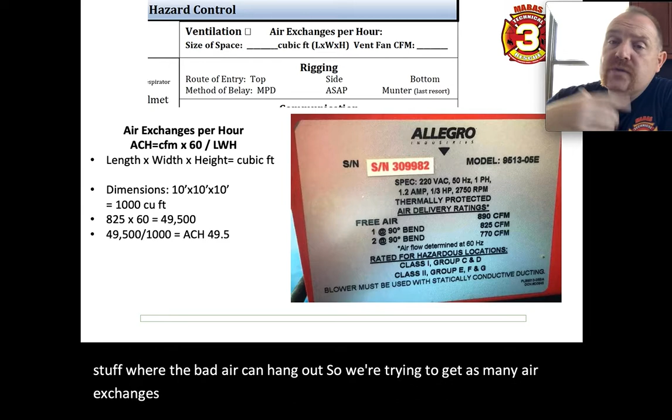So here's a question for you. If I have bad air in the space and I put a blower fan in there — so it's got bad air in there — we know that it is now a permit required space because there's bad air. If I put the blower fan in and blow out all the bad air, is it still a permit required space? The answer is yes, it is. OSHA specifically calls that out and says it's still a permit required space. Now, if you were able to block out the sources that would cause bad air, we could declassify or reclassify it as a non-permitted space. But that's not something we're typically doing in a rescue scenario — that gets done by the host or by the company.

So preparing for entry: site isolation, making sure nobody can get to the space, isolating the area from electricity, fluids, hazards, etc. Lockout, tagout, making sure we're locking that out. For us, it's most likely going to be the incident commander who is locking out and keeping control of that key for all the rescue teams. So, equipment selection — sorry, the little window is covering up the title — but thinking about what equipment we're going to need to get this done, depending on the scenario, it could require lots of different stuff.

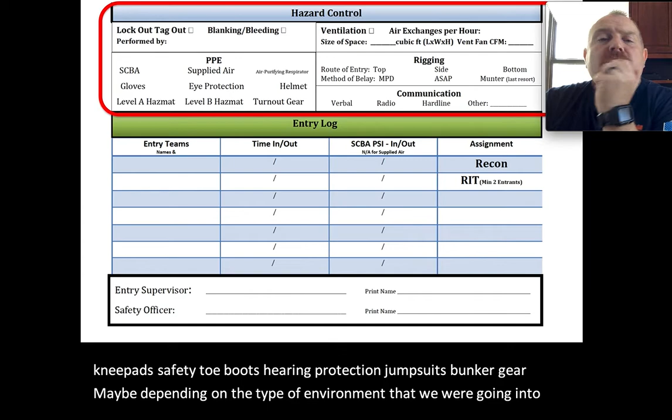The second page on our permit, looking at hazard control, make sure this is getting filled out: lockout, tag out, other different types of PPE that we might be using, Level A hazmat level. I hope we're not going to a confined space with Level A hazmat, that doesn't sound like a lot of fun. I don't want to do Level B, let alone Level A. But if we need to, we need to.

Air purifying respirators: an N95 is an APR. If you have one of the canister systems, that's an APR. Your Millennium mask is an APR.

Ventilation, we talked about. Your rigging, starting to think about what your rigging is going to be. What's our route of entry? Top, side, bottom. What's our communication method going to be?

The hardline comm systems take a little bit of time to get set up, but once they're set up, they're really pretty nice. Our radios might not always work for us. So if we can get the confined space system set up, even with the talk box, take that in with the entry team and leave it with the victim, or leave it where we're working, and that way we can communicate back and forth.

All right, so getting ready to go in: you have your atmospheric testing, your SDS sheets, ventilation equipment, rescue plan. You've got plan A, you're working on plan A. What's plan B look like? If this doesn't work, what are we going to do then?

Our rescue hierarchy, going in after somebody, this is a pretty standard hierarchy to use. Is it an assisted rescue where we just drop in a ladder? I think one of our towns, maybe not that far from me, they had to drop in a ladder into a sewer vault, and the worker climbed out.

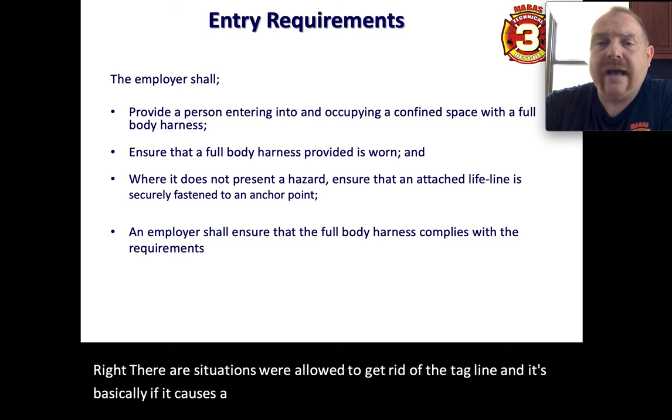There are situations where we're allowed to get rid of the tagline, and it's basically if it causes a greater hazard, not if it's inconvenient. If it causes a greater hazard. So if you're losing your tagline, now or by losing I mean taking it off, we have to be able to justify that. So it's not something that we want to get in the habit of doing. We just don't go in without taglines. There are going to be situations where maybe we can't because of the environment, but it should be the exception, not the rule.

So the entrant, the rescuer going in, needs to know what the hazards are. They have to be able to use the right PPE. They have to be able to maintain communication with attendants. When we talk about maintaining communication, it could be radio, could be hardline systems, it could be voice contact, whatever works. Might have to be hand signals if it's really noisy.

Get out of the space if they get ordered by somebody. If they see there's something wrong, if there's a prohibited condition, like you see something, fire, etc., spiders, if some type of an alarm is activated, then make sure you can let the attendants know there's a problem. The requirement of the attendant is to stay outside the space unless you are relieved by somebody else.

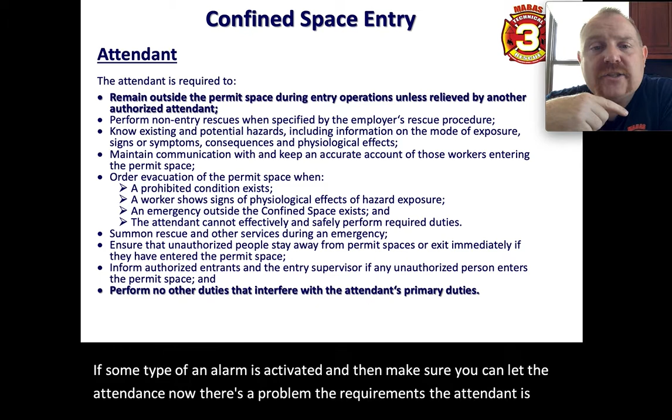So there's no requirement to have - how to say this - the 2-in-2-out rule has gotten kind of messed up somewhere throughout my career, where 2 in 2 out, 3 in 3 out, 4 in 4 out. That's not what it means. If I have 10 two-man teams in there, we don't have to have 10 two-man attendants out here. That just doesn't make sense.

But we have to have enough attendants or support for that attendant so that everything and all the jobs are getting completed, and everything is kind of taken care of. So know what the hazards are, stay outside, maintain communication, know what the prohibited conditions are, and then alert somebody, alert the workers to get out. Call for more help or whatever if needed. Perform no other duties that interfere with the attendant's primary duties.

And this is probably the one that gets us into the most trouble, like at drills and stuff, we're chatting with our buddies that we haven't seen since last month. Just make sure that we're staying focused and doing the job that we're supposed to.

The entry supervisor, probably going to be a squad boss, who is going to give the go, no-go, to be able to pull somebody out. Here's the thing, guys: this stuff only works if the squad boss says no, you're not going in, and you don't go in. If the squad boss says stop, I'm switching you out, you're coming out - and none of us want to get pulled out.

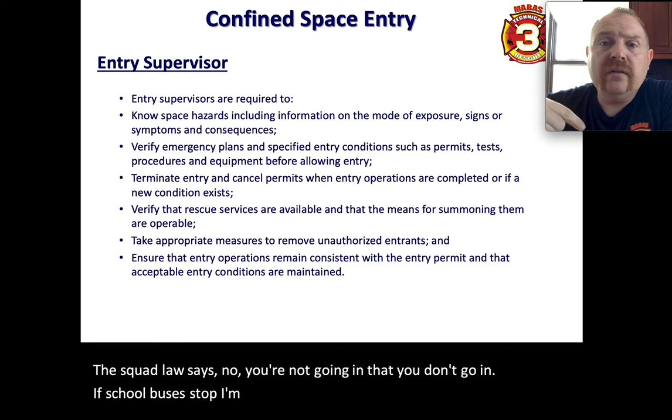But what ends up happening is the entry supervisor, that squad boss, says, 'Hey, we're switching you out, we've got another team coming in.' And the response is, 'No, no, no, no, no, 5 more minutes, I'll just...' You know, I get it, but they pull you out. They got to pull you out.

This only works if we put the hierarchy in place. You got to listen to them, you just got to. So I always very much appreciate guys throttling up, wanting to work harder, but if they pull you out because something's unsafe, they're pulling you out, and there's no discussion about it.

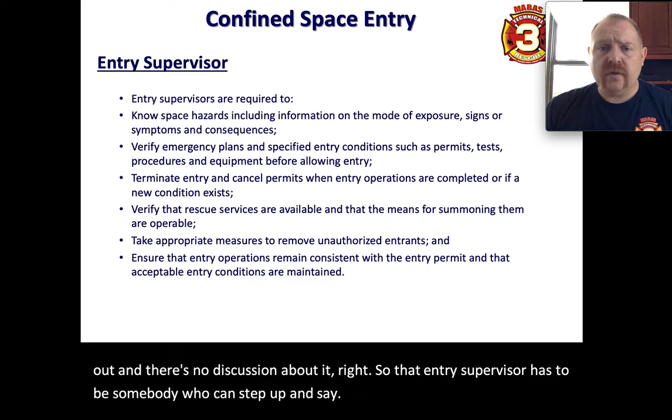So that entry supervisor has to be somebody who can step up and say yes or no. It's their name that's going on that permit. If one of the directors is there, they may sign off on that for you, but only if they kind of know what's going on. So knowing what all the exposures, all the signs and symptoms are, verify that everything is set up - and verify requires something of the entry supervisor, the squad boss.

That means check it. You should be trusting who's giving you that information. If you don't trust them, I wouldn't accept that as being good information. Terminate the permit when everything is done. Verify that rescue services are available for us. That's going to be make sure we have a backup for our guys.

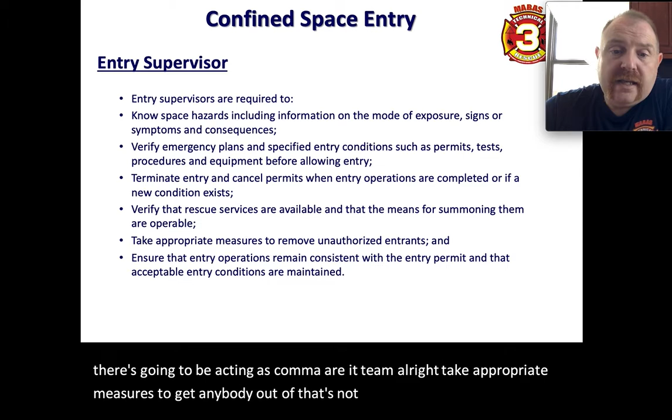So we should have a team on deck ready to go that's going to be acting as kind of a RIT team. All right. Take appropriate measures to get anybody out of there that's not supposed to be in there, and then everything. Make sure that it stays consistent with what the permit is saying. So as far as rescue, employers are supposed to have readily available rescue. Not always the case, especially when they're trying to rely on us.

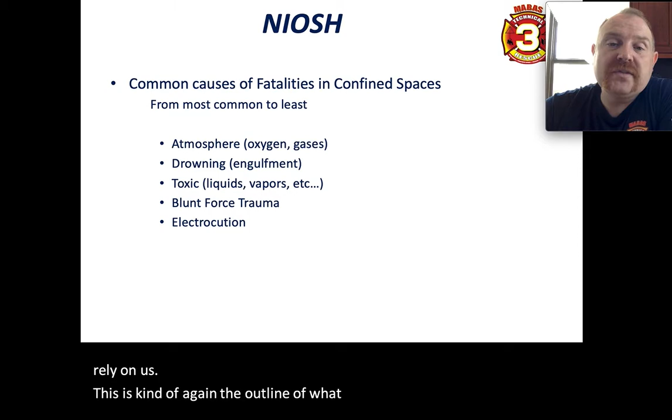This is kind of again the outline of what NIOSH told us as far as the most common causes of fatalities. NFPA 1670 says that we need to be trained at least to the BLS level. In Division 3, we're going to have ALS companies who are there. If we need to provide medical care in the space, and I've got 2 non-medics in there, that doesn't make a whole lot of sense.

So if we're talking about recon teams, if we're talking about entry teams, and we're talking where we have to be providing care in the space, squad bosses, you need to, hey, are you still a medic? I know we have lots of lieutenants who are on our team who I know go on ambulance calls, but maybe they haven't done any skills in a while. So let's make sure we choose wisely who we're sending in if we need to do care.

All right. So 1910.146(k) is where they talk about rescue. This is the whole rescue section. Things that are highlighted in there, that employers have to be able to evaluate a prospective rescuer's ability to respond to a rescue summons in a timely manner. What's timely mean? Respiratory protection is required in the event of an IDLH atmosphere. They need to have a standby team. Most of the time they're thinking that that's us, and we all know that's probably not us.

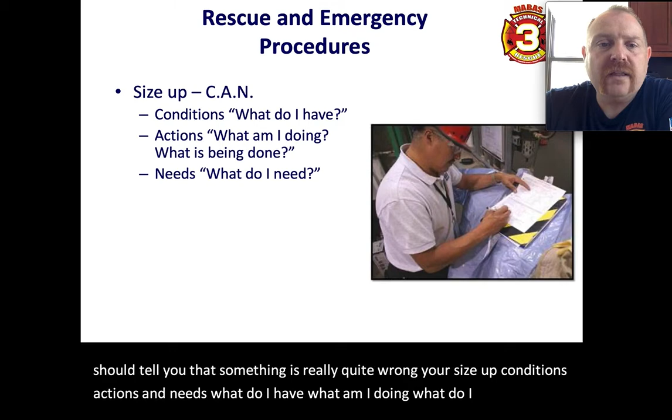So the event of a rescue, you show up. Phase 1 is going to be your assessment of your scene, size up. Ask for their permit. If they look at you and say, hey, we don't even know what a permit is, that should tell you that something's really quite wrong. Your size up, conditions, actions, and needs. What do I have? What am I doing? What do I need? Remember the needs part of it. I like the N being on there because it kind of forces me to think about maybe not what I need right this second, but what am I going to need?

All right. Phase 2, pre-entry operations. Who do I have? Whoever's showing up, you're there and the team's starting to trickle in. If you're the first team member there, you are by default the TRT incident commander initially. Nobody else is there. So make sure you go up to whoever is incident command and say, hi, I'm here. What do you need from us? Who do we have so far? What equipment is here? Do you have a squad? Is it here? Because, hey, we have a squad, but it's sitting in the station because nobody brought it. Doesn't do us a whole lot of good.

If you start seeing your A-team players show up, you have a good strategy. Versus if you have your D squad showing up, you might go, all right, I got to adjust what it is we're going to do. What's plan B? In the event that this goes wrong, what else are we going to do? Equipment selection. Am I going with the standard tripod? Am I using a Vortex? Is there a structural anchor overhead? Am I using just a 4-to-1 block and tackle, or are we doing like with an MPD where we're going through a change of direction and then back to the MPD?

Atmospheric testing, do we have multiple meters? Do we need SCBAs? Do we need supplied air? If we're looking at rigging, our belays, man, if I've got a tripod and I can hang a Petzl ASAP upside down, you walk up as a rescuer, and I take your tagline and I can run it through the ASAP upside down, run it through, and then through a carabiner. There's your belay. I put you onto a 4-to-1. I can get you into that space. All right. Versus a twin tension system, tandem Prusik, or a Munter hitch.